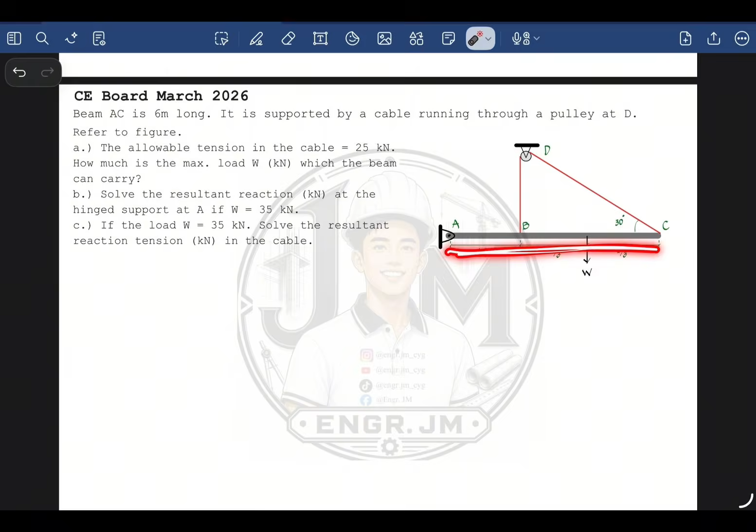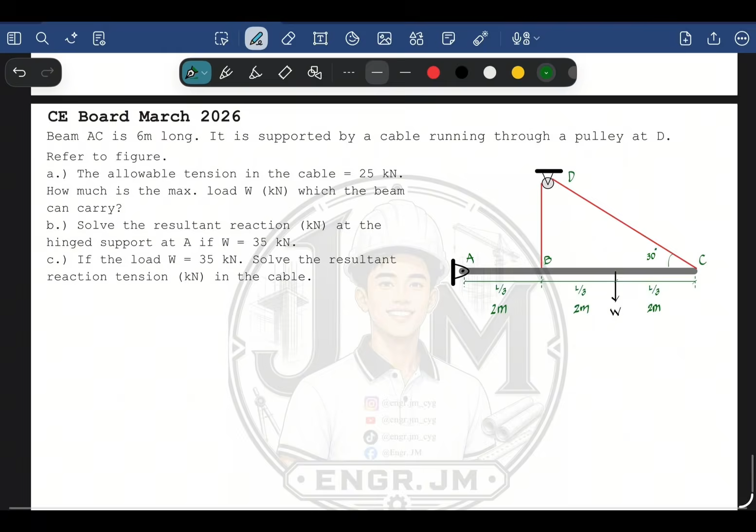We have a beam, AC, which is 6 meters long. It is supported by a cable running through a pulley at D. Since it's 6 meters and divided into L over 3, that means 2 meters, 2 meters, 2 meters. And we have a pulley at D.

So what's the first question? The allowable tension in the cable is 25 kN. Our cable is always in tension, so we're given a tension force of 25 kN. The question is, how much is the maximum load W, in kilonewtons, which the beam can carry?

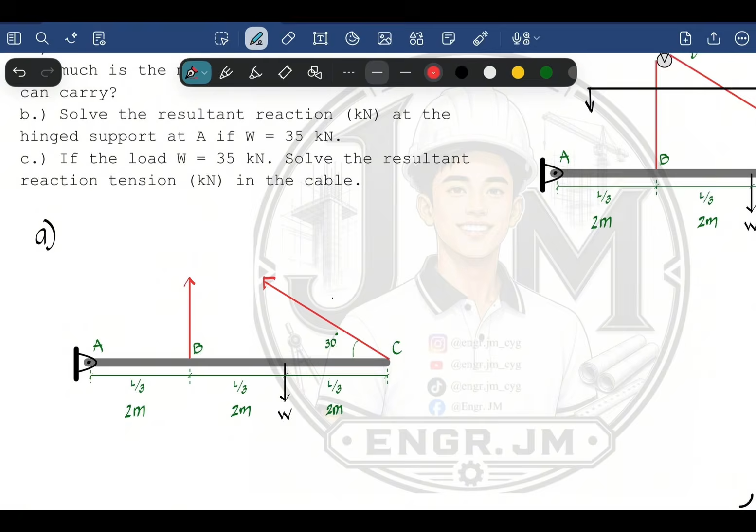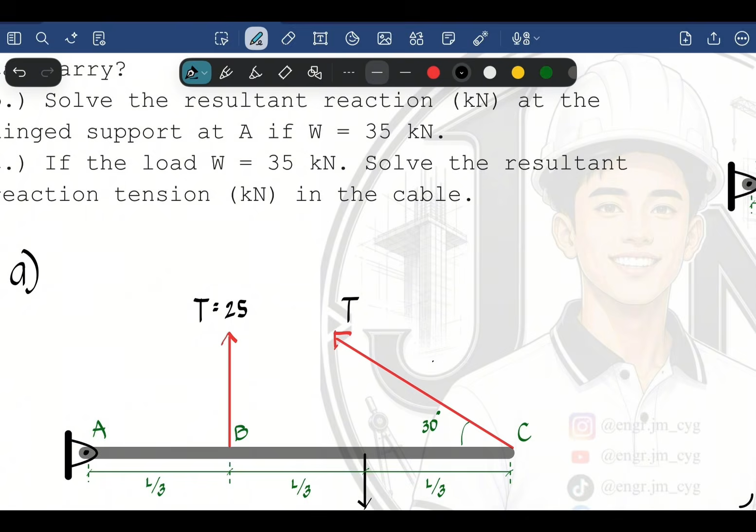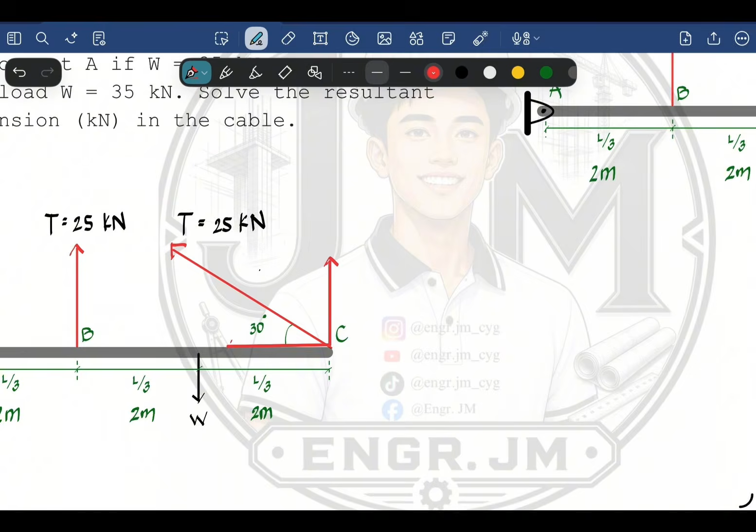Let's call that T. We're given a tension force of 25 kN. Since this is like a resultant, it will have components, vertical and horizontal.

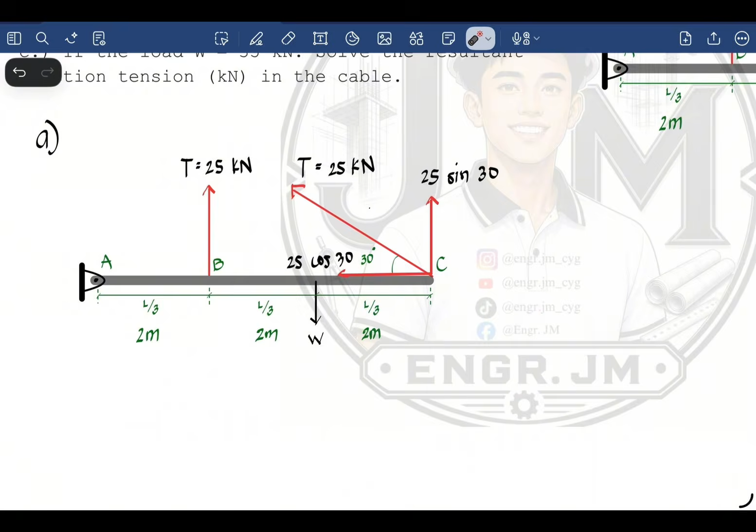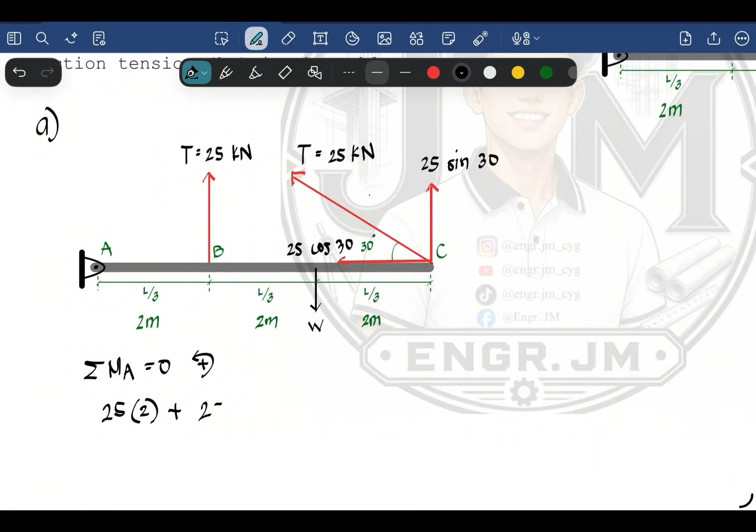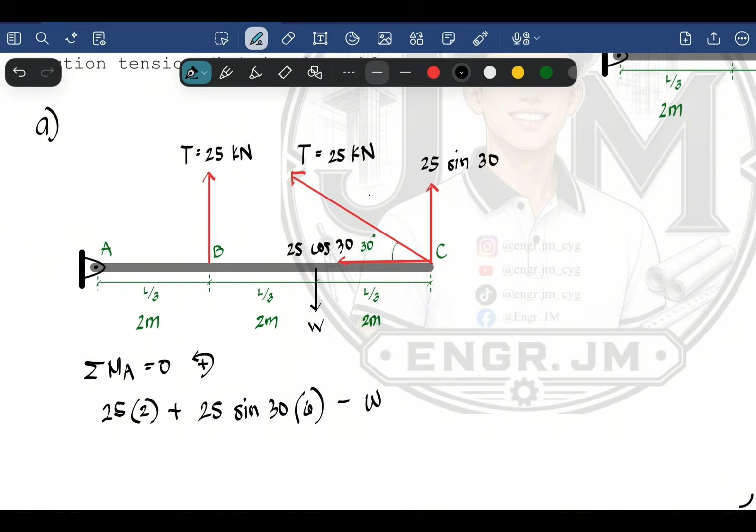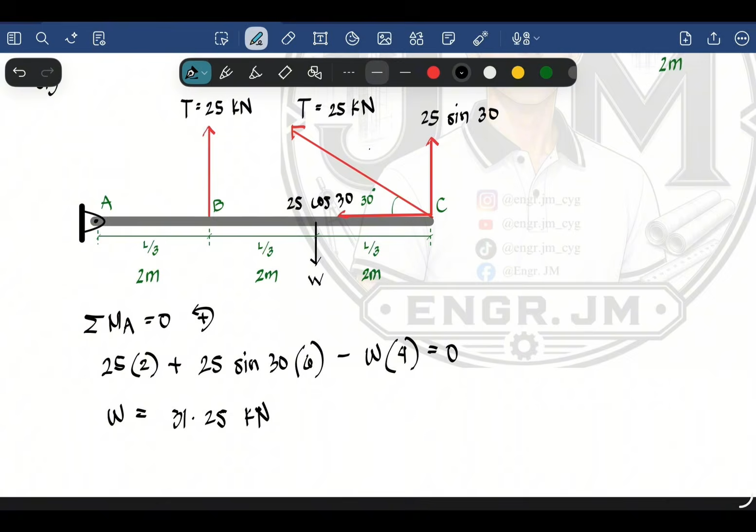Let's try it: summation of moment at A equals 0, counterclockwise positive. What's counterclockwise here? This, 25, with moment arm 2, plus 25 sin 30 with moment arm 6. Nothing else rotates counterclockwise, so we make it negative since W rotates clockwise, with moment arm 4. From that, we get the value of W, which is 31.25 kilonewtons. So that solves the first problem.

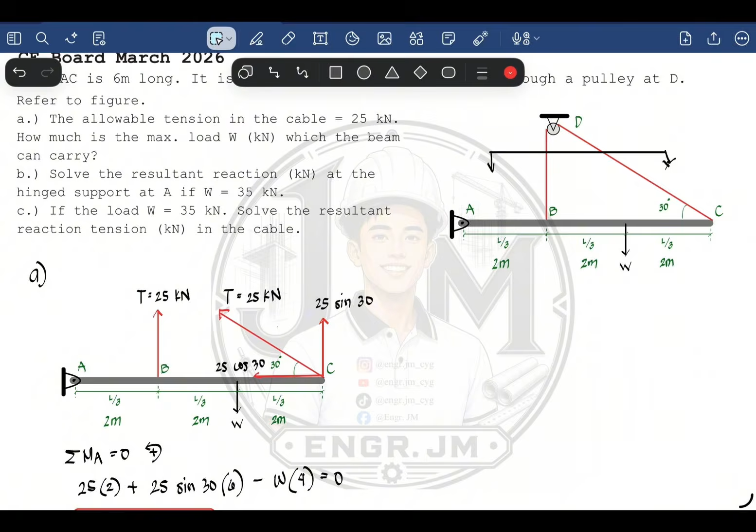For the second question: solve the resultant reaction in kilonewtons at the hinge support at A if W is equal to 35 kilonewtons. Let's copy this again.

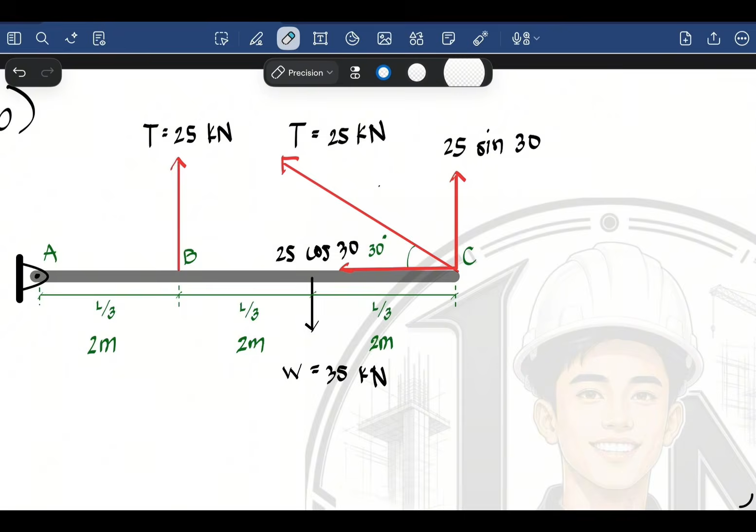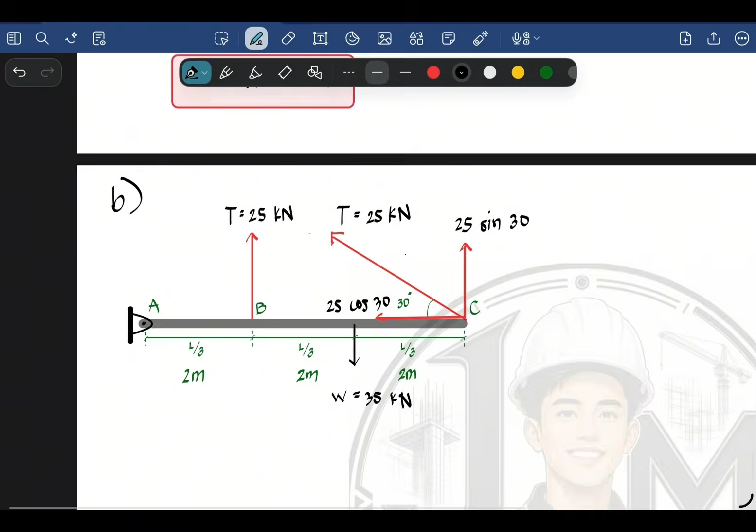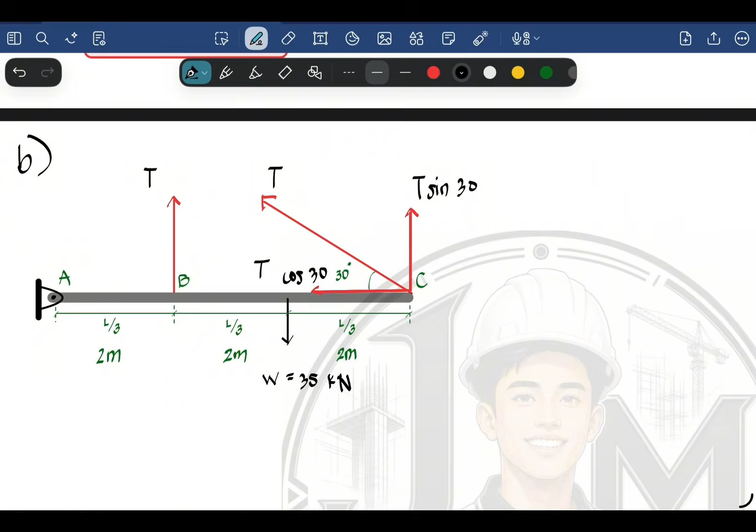So how do we do this, guys? Since we have the value of W, but we don't have a given value here, let's say T sin 30 and T cosine 30. Since we have the value of W, we can get the value of T by taking the summation of moment at A again.

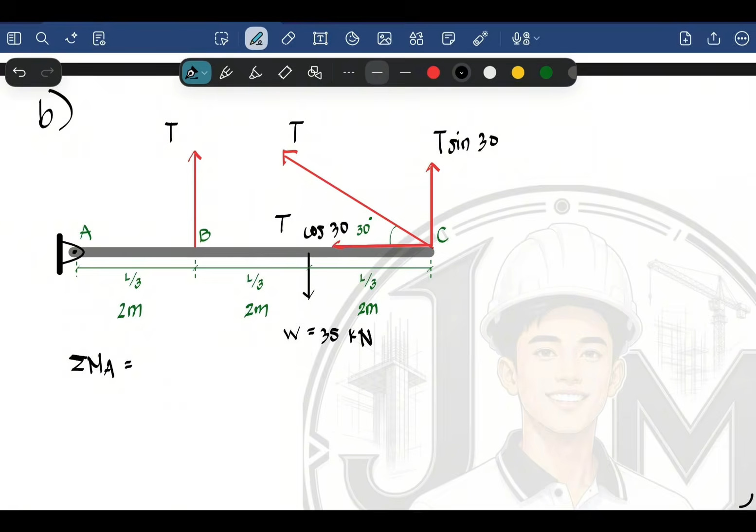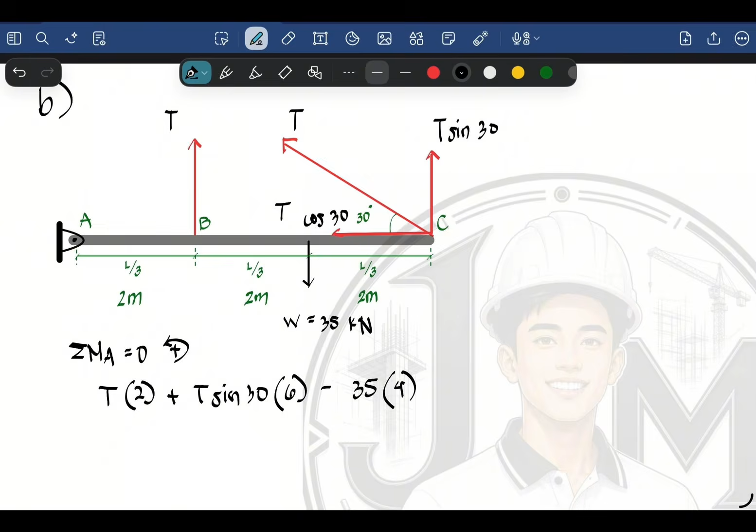Counterclockwise positive, what rotates? T, times moment arm 2, plus T sin 30 with moment arm 6. Nothing else. Then W, which is given, with moment arm 4, equals 0. From this, we get the value of T, which is 28 kilonewtons.

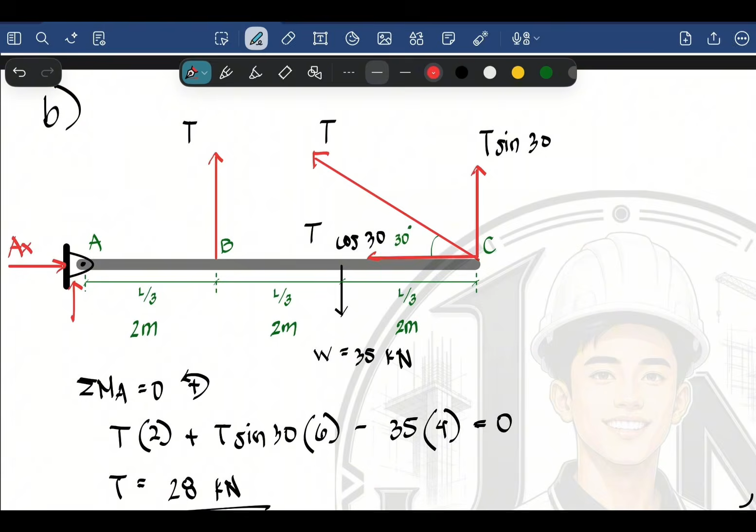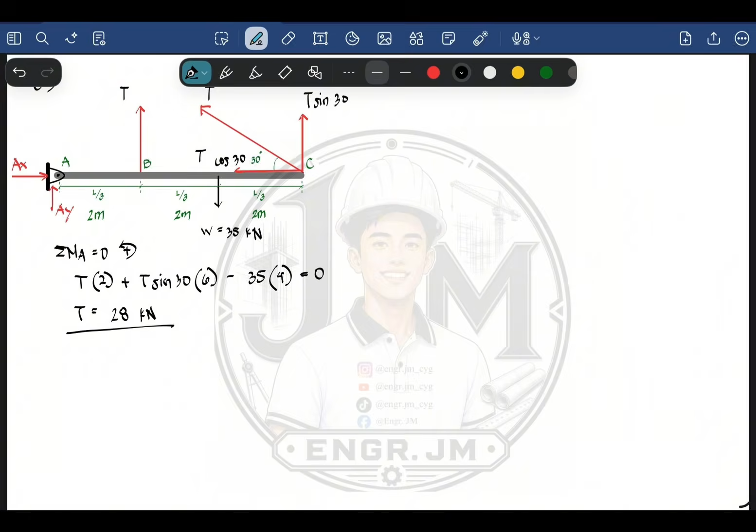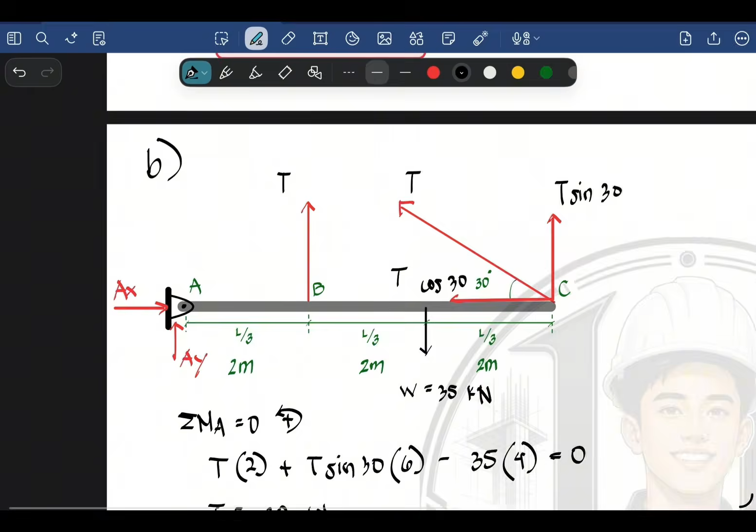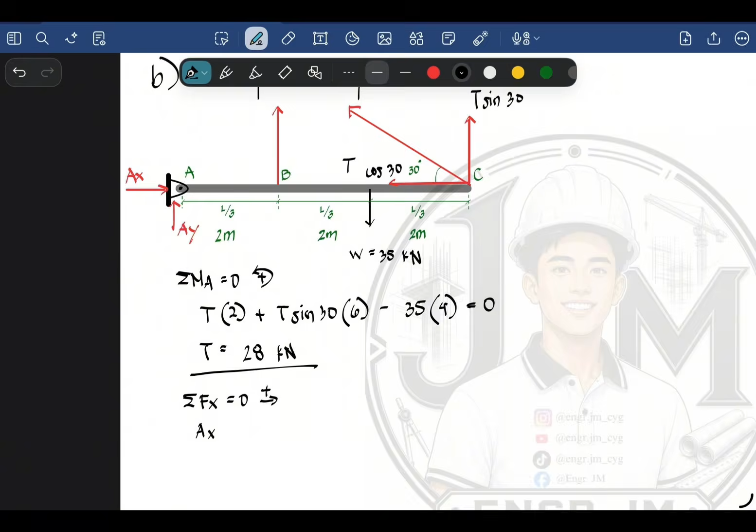We already have values for W and T, so we can solve: summation of forces along X equals 0, going to the right positive. What's positive there? Ax. Since T cosine 30 goes to the left, it's negative. Substituting the value of T, 28 cosine 30. So Ax equals 28 cosine 30, which is 24.25 kilonewtons.

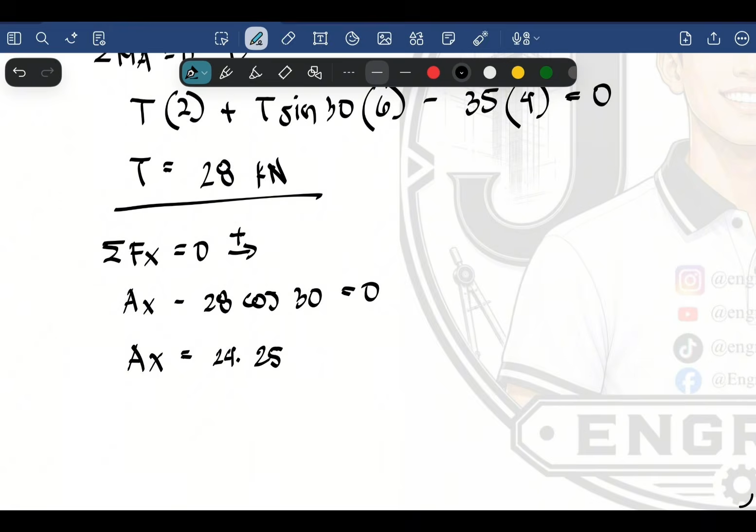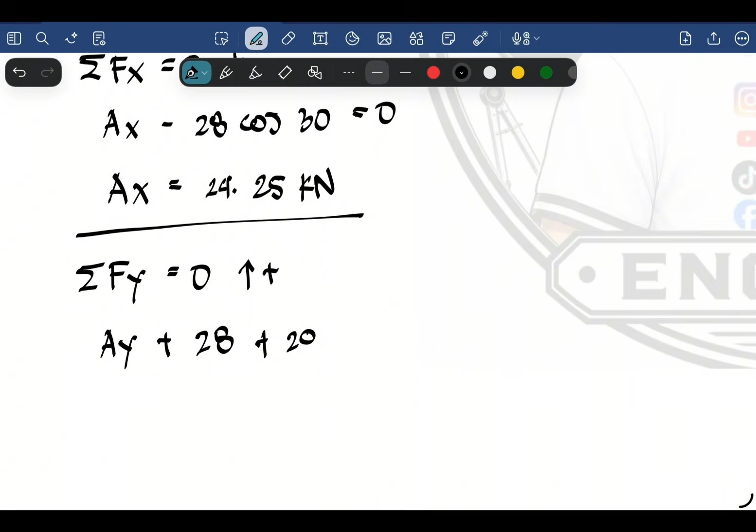Now we have the horizontal component of A. Next, to get the vertical component of A, summation of forces along Y equals 0, going up positive. What's positive there, going up? Ay, plus T which is 28, plus 28 sin 30, and then W, since it goes down, is negative 35.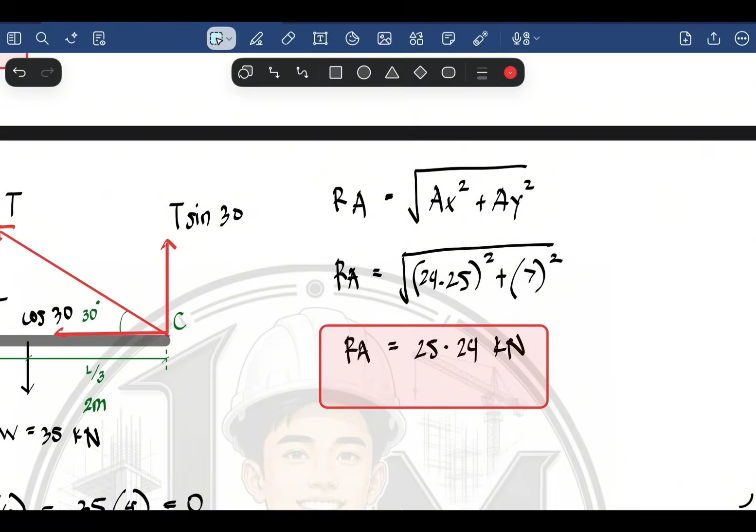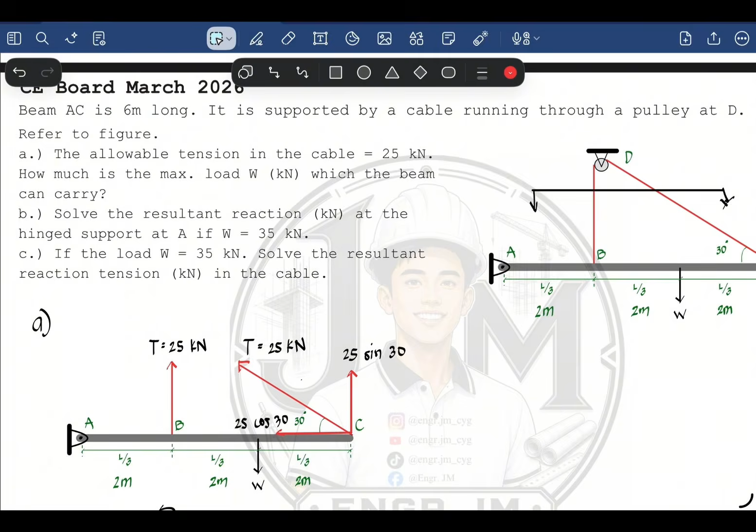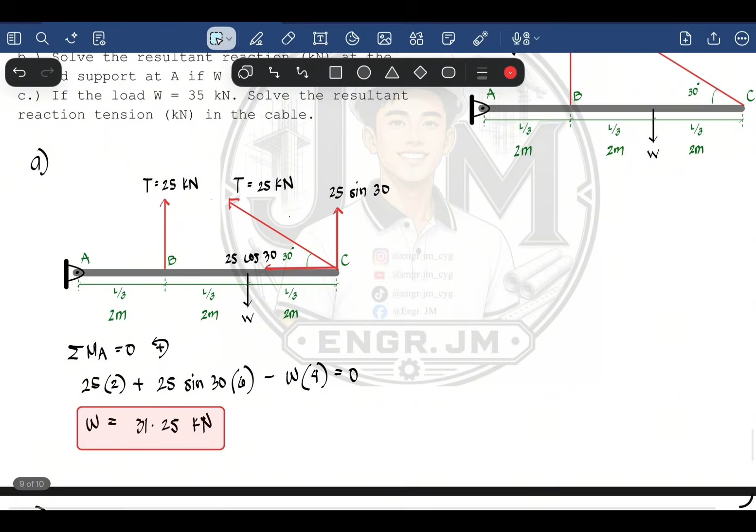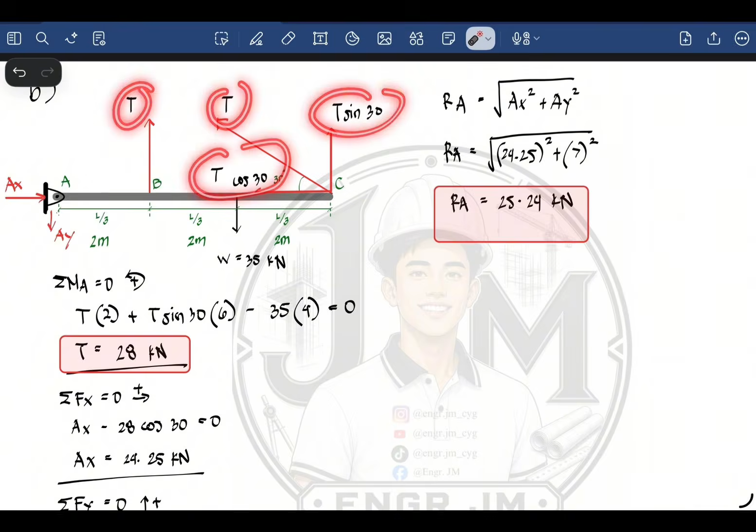Since we already found the resultant, let's move on to part C: if the load W is equal to 35 kN, solve the resultant tension in the cable. What do we notice? We already found this force. Since the given W is the same, and what we're looking for is T, we already solved this earlier using summation of moment at A to get T.